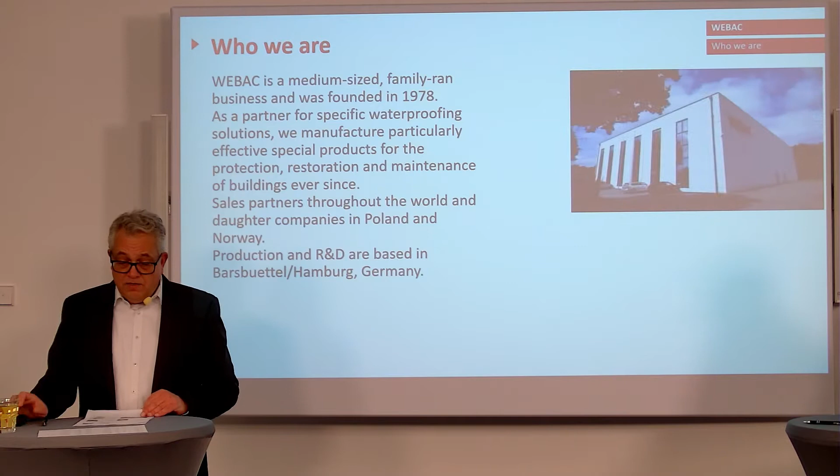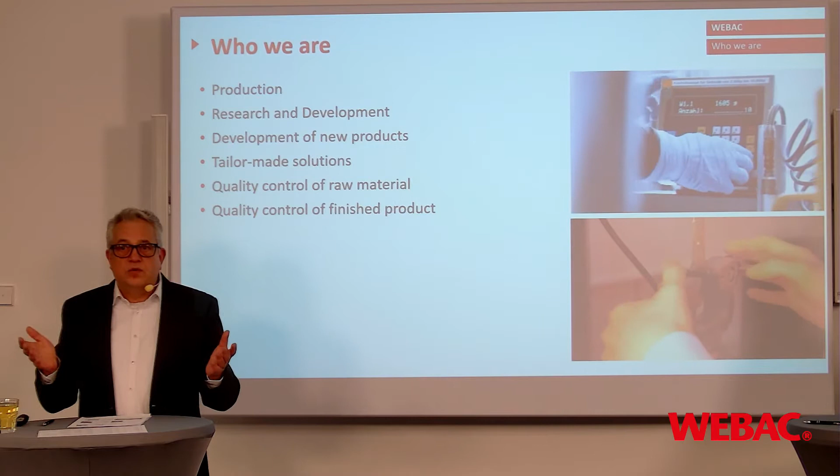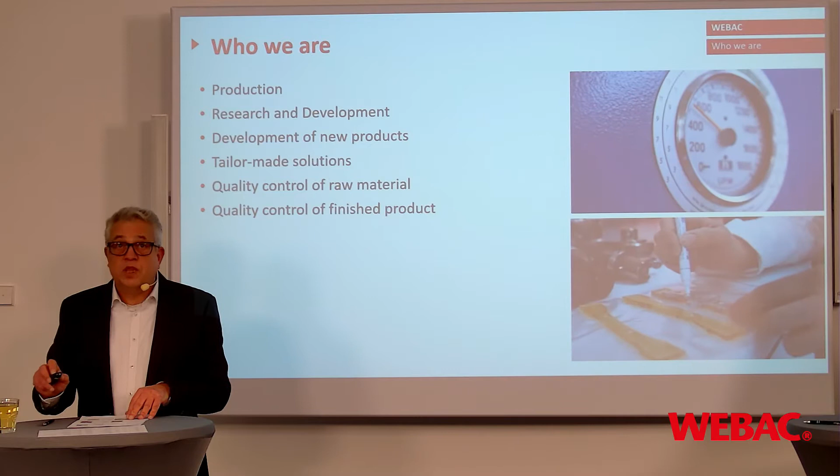WEBAC was founded in 1978. We are still a medium-sized family-run company. We are located here in Barsbüttel with our production, with our research and development center. This is very important, as you know, you find different climate zones, so the short way into the laboratory is essential for us. We are here in our seminar room, which becomes suddenly a TV studio.

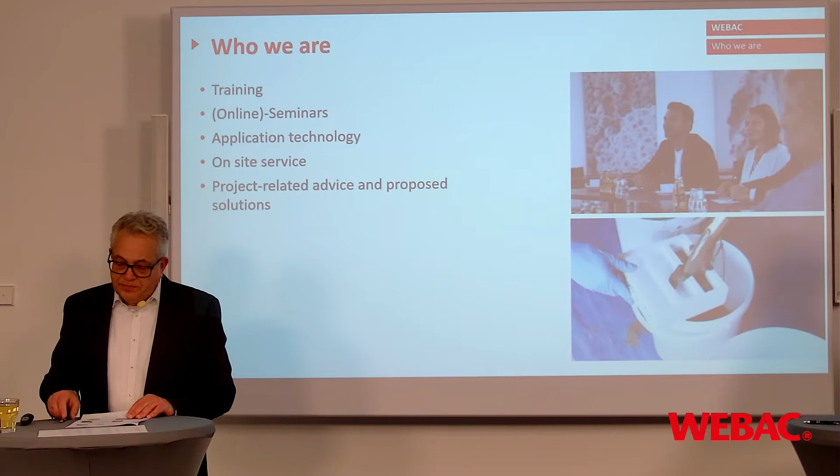Normally we give trainings here for designers, where the focus is on durability of the building. We give trainings for applicators, which is a little bit more hands-on training, how to drill, how to inject, what is the right injection pressure. But also for site managers, how can I control the injection works? What is in focus? What kind of material has to be used?

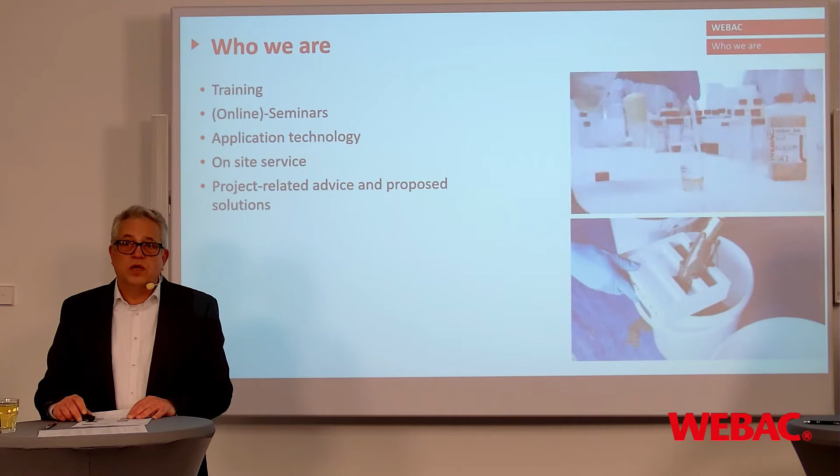Yes, we also provide the service, a site service. So if you have questions or if you have a building site where you are a little bit unsure what kind of material, how to apply, give us a call and we are at your site.

Today, our live seminar is about the sealing and stabilization of concrete. Should it be force transmitting? Should it be simply waterproofing? There, Maurice will tell you, will go more into the details.

Yes, I do. So our seminar is scheduled once again for 30 to 35 minutes and it will contain the following topics: the principles of crack injection, the analysis, what kind of state of dampness is on your building, the objective of use, what kind of filling materials there are, what is the difference between them, and how the injection procedure looks like.

As you can see here, we are talking about cracks simply in concrete. The reasons for the cracks, why they occur, how they are treated, are going to follow now.

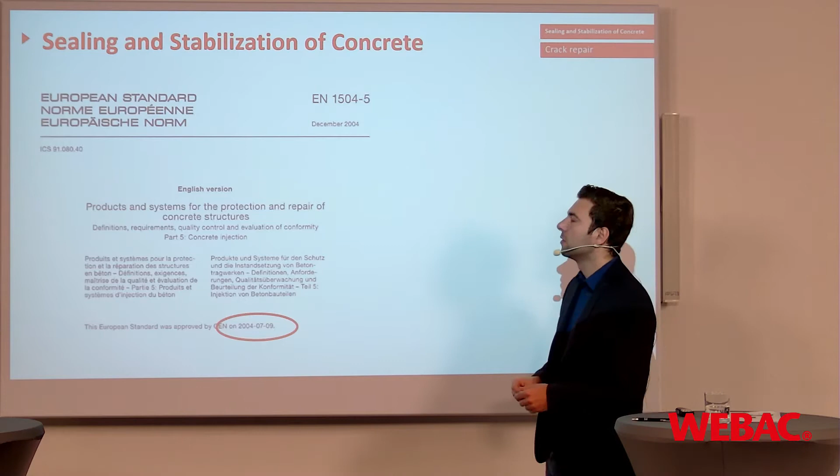First of all, we would like to talk about the standard. There is a European norm which regulates the crack injection in reinforced concrete. It is called EN 1504-5, and maybe you can see it here, highlighted.

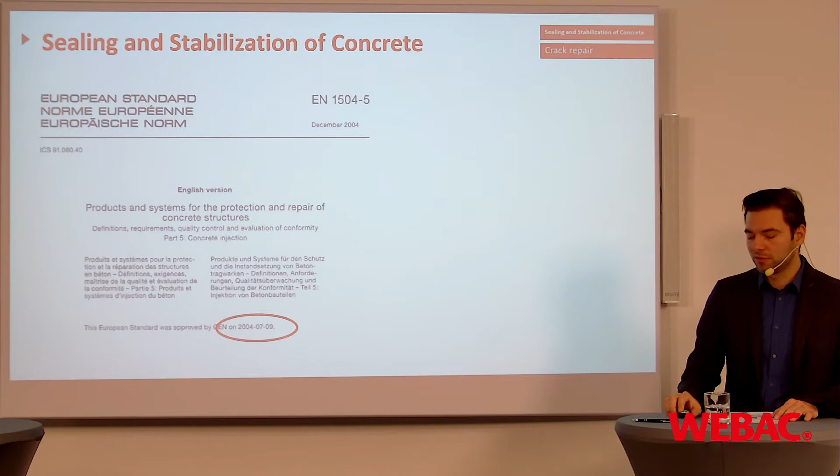The development of the injection materials has been ongoing, and therefore there might be some products that are even better or that does not fit into the norm that has been harmonized almost 20 years ago.

Like usually, I think most of you have followed our presentations yesterday. Once again, it's very important to carry out an analysis prior to your injection.

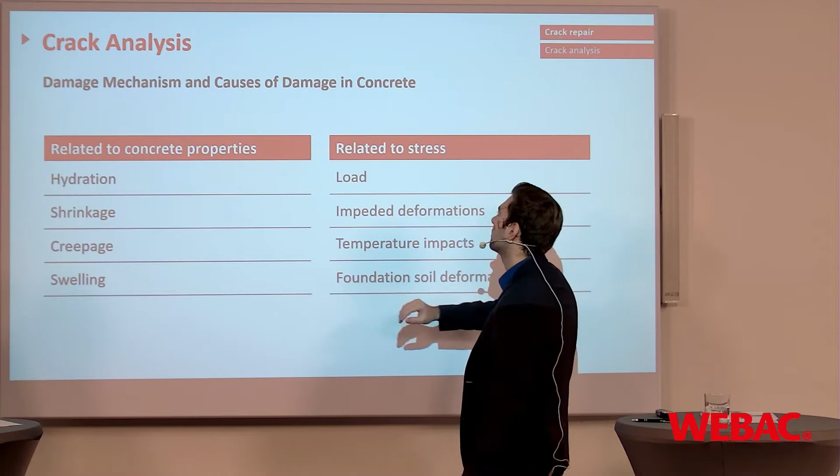So first of all, we would like to talk about the reasons why the cracks occur in concrete, and therefore there are two main reasons. One is related to the concrete properties, you can find them on the left-hand side, and the others are related to stress, on the right-hand side.

So first of all, you probably know how the concrete is behaving during the reaction. There is hydration in the concrete. The concrete can shrink, or there is creepage, or the concrete can even start to swell. So therefore, all these reasons that are related to the concrete properties, they can cause cracks in the concrete.

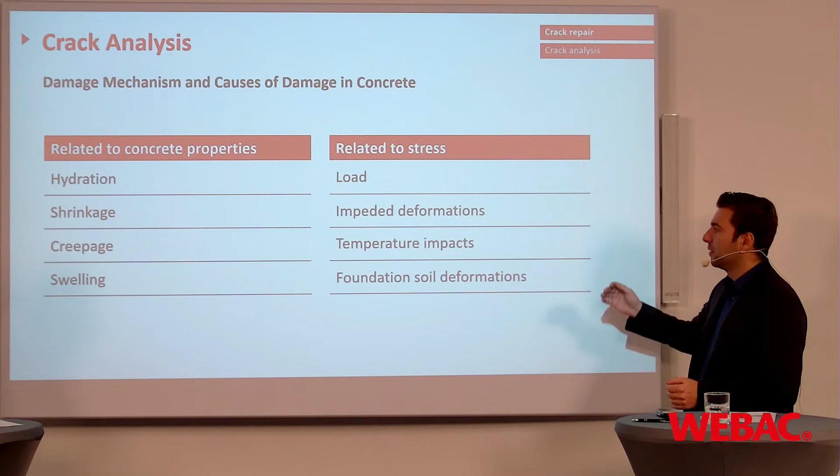The other causes are related to stress, which can be loads, deformations, temperature impacts, or deformations of your soil. What does that mean? If your building, for example, was designed for loads with forklifts of 5 tons, and after some time you see a change that the forklifts are now 10 or 15 tons, for sure this is going to have an influence on your structure, on your concrete. So unexpected loads on the concrete can cause cracks. Temperature impacts, the difference between summer and winter, big changes in temperature, or deformations in soil, like washed out soil underneath your structure causing settlements, can also cause cracks in your structure.

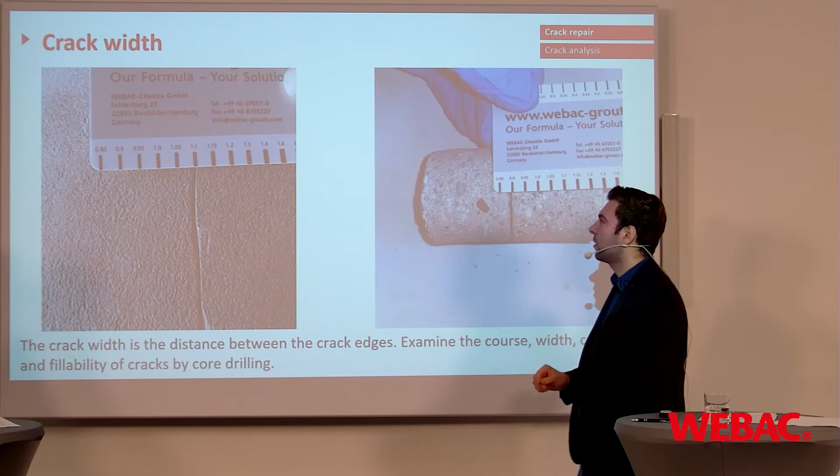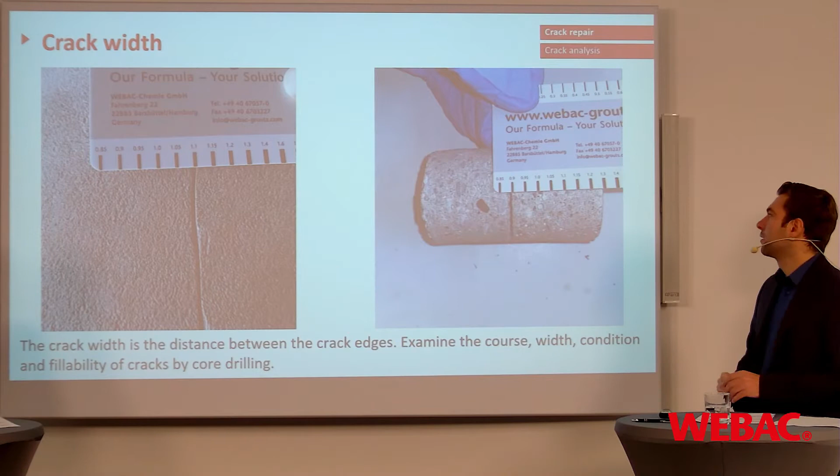It is very important to measure the crack width prior to the injection, and there are two ways of doing it. You can simply measure with a crack scale the width of your concrete on the surface. The other option, which isn't more complicated but requires further work, is to take out a core drilling. This core drilling gives you a better feeling and understanding of how the crack is going through your structure. Is there any change in the crack width? Is it smaller, thinner, or wider? Is it an even crack in the concrete? Are there pathways? These are things you cannot see from the surface, and therefore you would need to take out the core drilling.

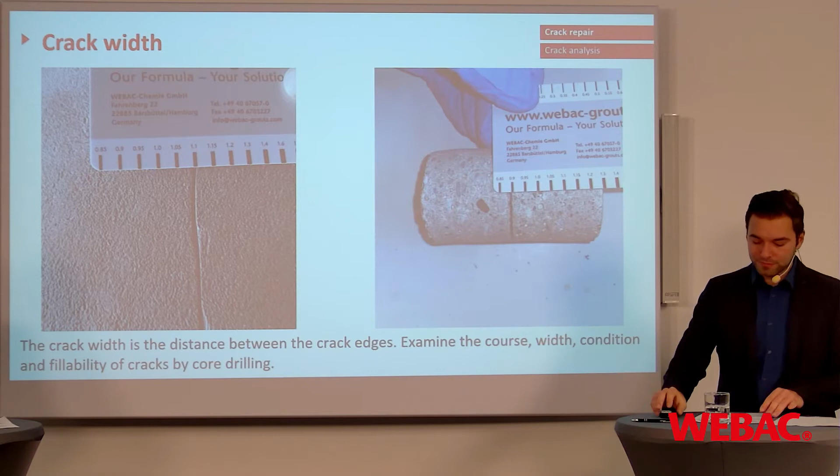Also, as you can imagine, there can be crack width changes, and depending on the changes, you need to see when the best time is to inject the crack. The most common or most known area where you can see this is the bridge deck. You have the expansion joints, and in summer times when it's warmer, the concrete is a little wider and the expansion joint is smaller than in winter times when the concrete is cold and shrinking once again. So the expansion joint is always a good indication of crack width changes, and you have to be aware of that and keep these changes in mind when you carry out the injection.

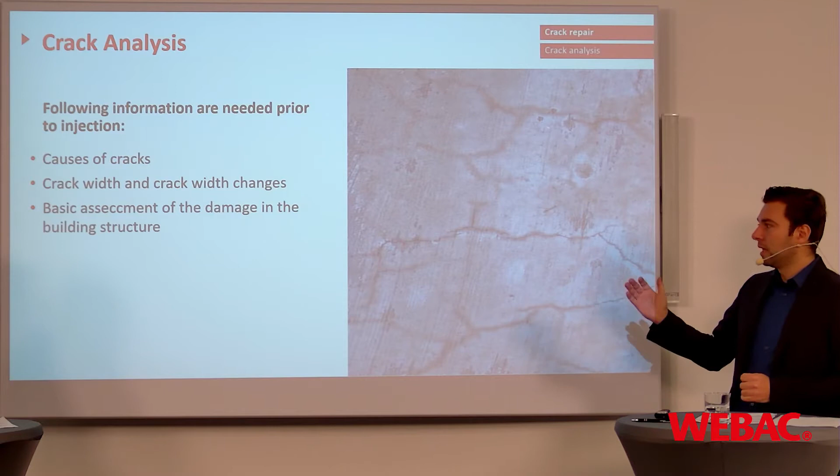So just to summarize what we've been talking about, before you carry out the injection, you would need to know the cause of the crack. Why do I have a crack or cracks in my building? Then for sure the width and the changes of the width, and also whether there are further damages in your building.

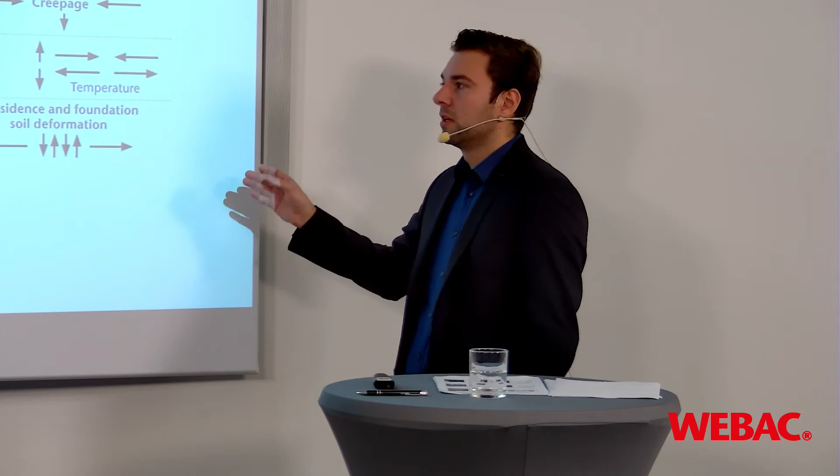There is going to be an overview of what kind of things go into the concrete repair work. So we are talking about construction joints in your basement. Depending on the concrete quality, there can also be gravel nests or just cracks. Once again, the connection between the bottom slab and wall, the construction joint there, especially when we are talking about basements.

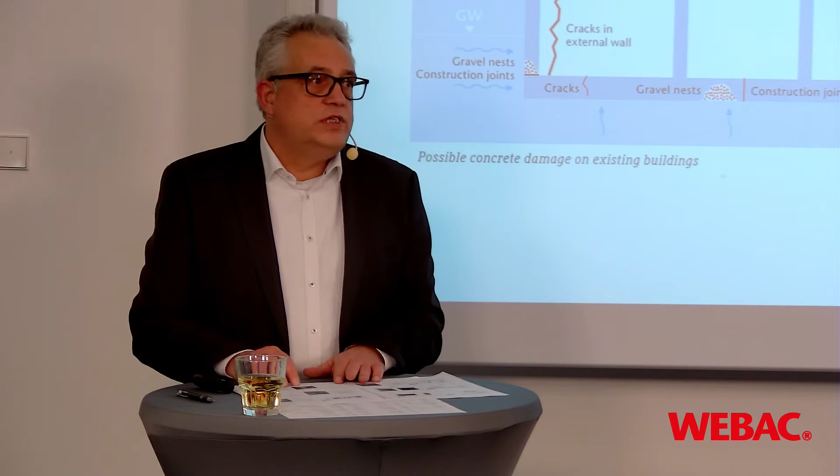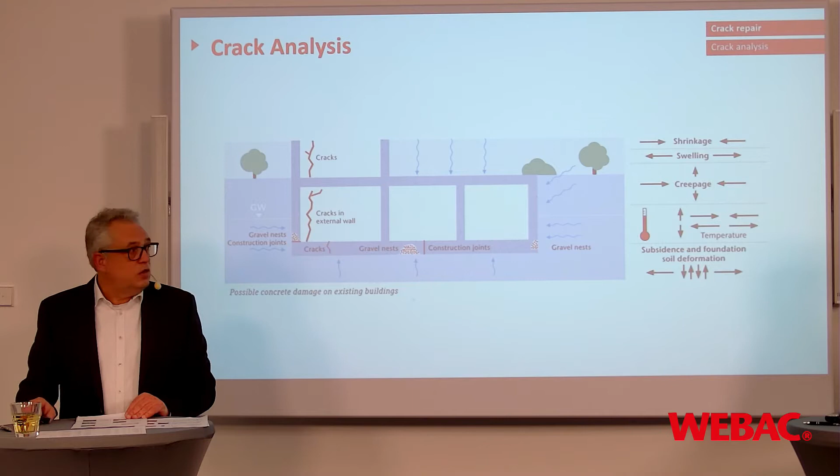And you probably are below groundwater level, where you can have the influence of water. Or if you're above groundwater level, then we are probably talking about dry cracks here. There, the point is also due to the shrinking of the concrete, you will receive mostly in the wall separation cracks. These separation cracks will go through your whole concrete, meaning the reinforcement is also exposed to water, and this can cause corrosion of the reinforcement. For the lifetime of the building, this is a big issue. So regarding shrinkage, it is in the interest of the contractor that when he pours the concrete, he doesn't use a lot of crack inducers.

So these are the most common cracks which have to be treated.

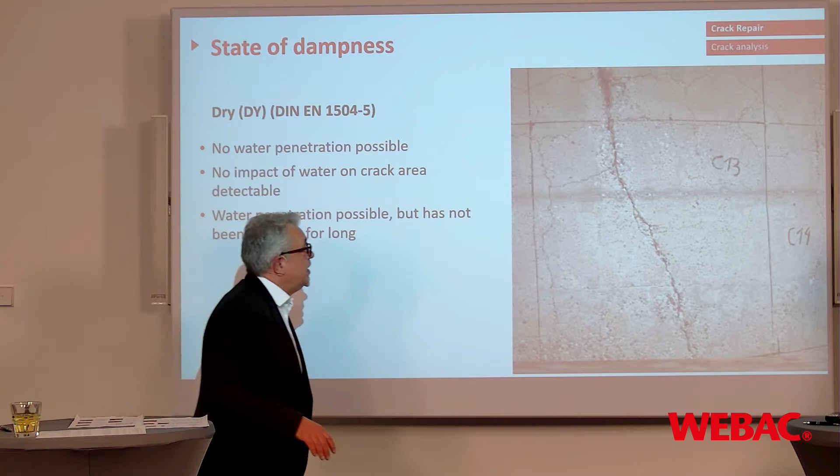Let's talk a little bit about the state of dampness. You mentioned it already. There are different states of dampness, above groundwater level and below groundwater level, and you have to treat them differently. So, state of dampness: everybody knows what a dry crack is. Here in the crack you see no water penetration.

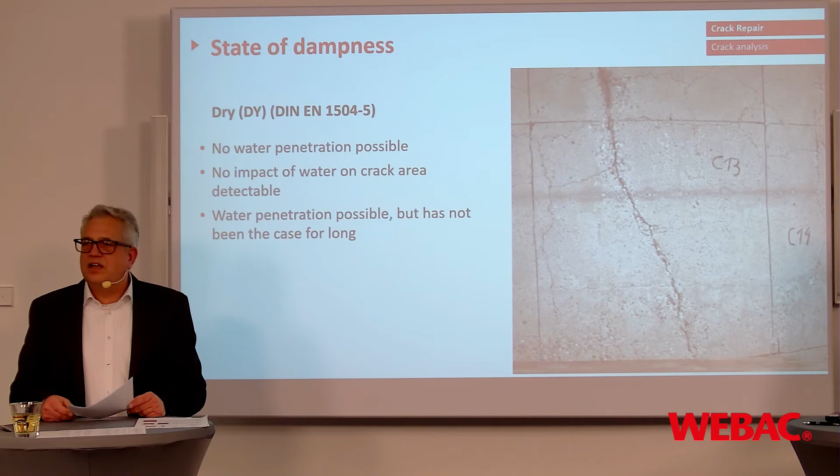The definition in the norm is a little bit funny for me: water penetration is possible, but has not been the case for a long time. How can you measure this? Whenever I hear this sentence, I think of an engineer sitting on a chair in front of the crack and observing it. But in my world, a dry crack is a dry crack.

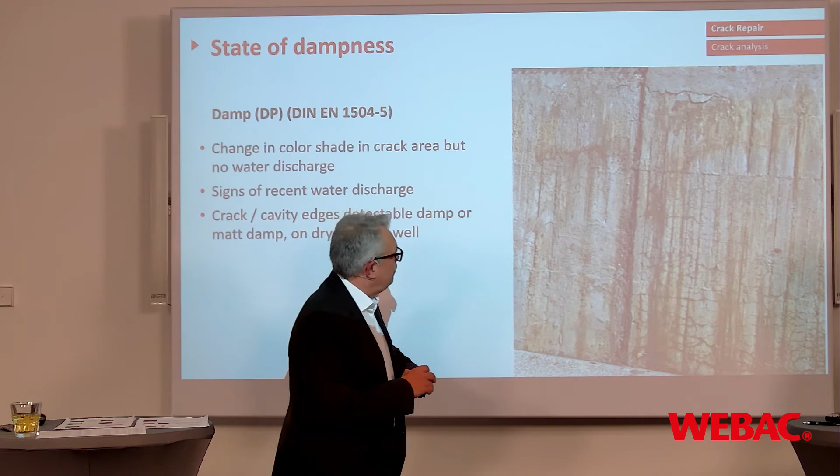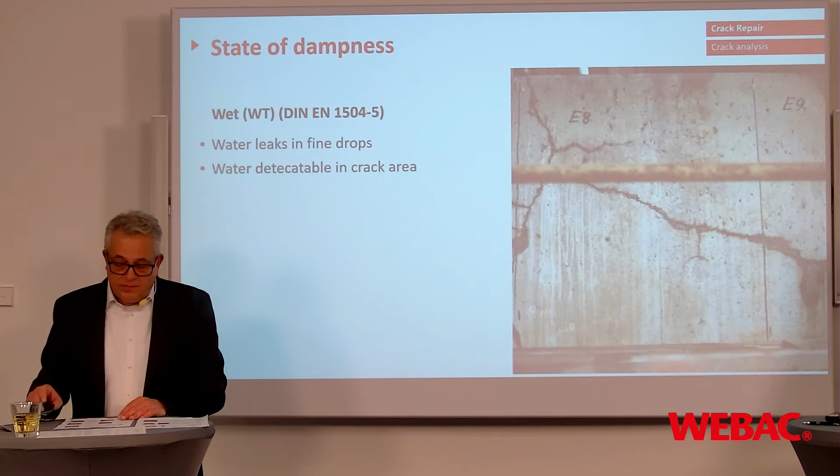Then you find damp cracks. All of us have seen it, where you see some shadows. In this case, cracks close to the surface. Here's a smaller one, but here you also see penetration of water along the reinforcement. Then wet cracks, you see here. There you find water in a liquid state, and here you also see some finer drops coming out of the crack. So this is the definition of a wet crack.

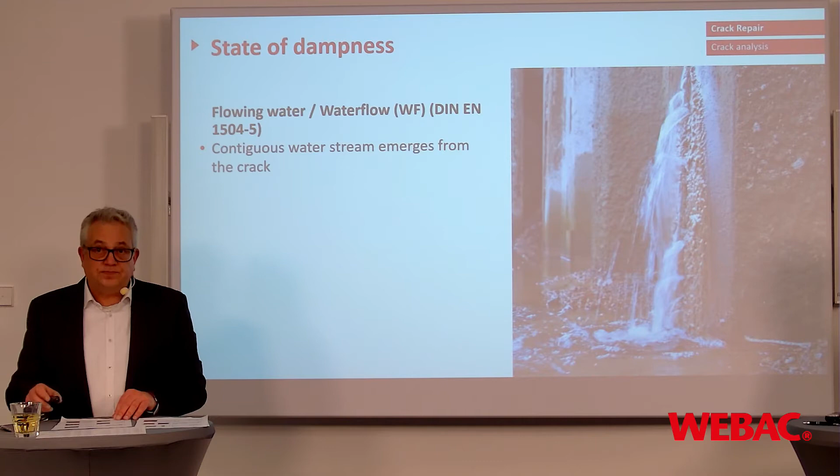And last but not least, I hope you don't have this case in your basement: pressurized water. So water is coming out of the crack, or in this case, out of a sheet pile wall, in a liquid and pressurized state. Four states of dampness: dry, damp, wet, and pressurized water. These cases have to be analyzed, and according to this, we also choose the filling material.

The definition in EN 1504-5 makes the difference between performance and workability. The performance is simply: what would you like to achieve? Would you like to glue the concrete together again? This is force-transmitting filling, category F, for structural bonding. Then the ductile filling of the crack. You will come later to the point of the material. This material is a little bit more flexible and can take some movements.

And last but not least, category S. There we are talking about acrylic gels, mostly for swelling fitted filling, meaning the material swells a little bit, and due to the swelling pressure, the crack gets sealed.

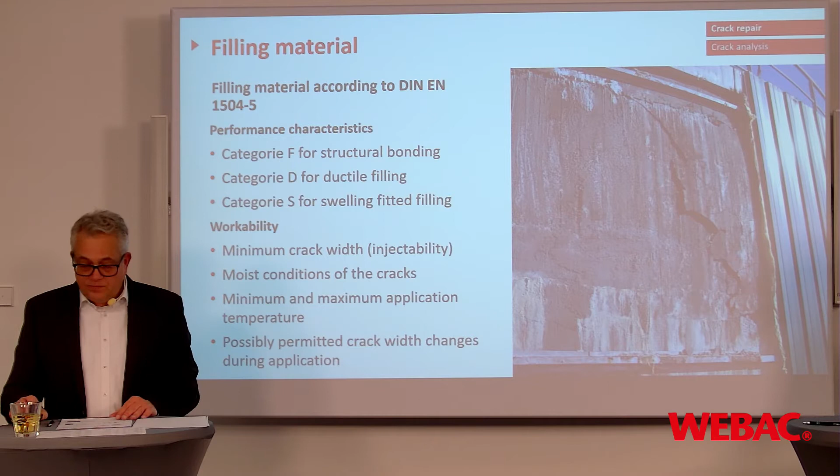On the workability side, as you already mentioned, it is important to know the crack width. You cannot inject a crack of 0.001 millimeter. That's simply not possible, but it will be dry anyway, so there's no need to. You have to take into consideration the minimum and maximum temperature, and also the crack width change during the injection. Okay, Maurice, now it's your turn with a comparison of impregnation and injection.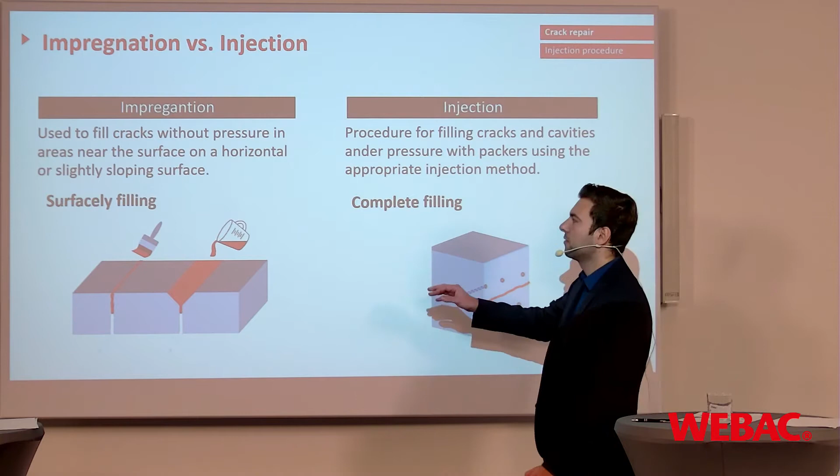So usually there are two ways to seal cracks in concrete. First of all, we are talking about impregnation. As you can see, impregnation goes into the structure by gravity. So you just pour the injection material into the crack, or you brush it in. As you can see, the filling grade is not that good, and therefore it's only a surface filling.

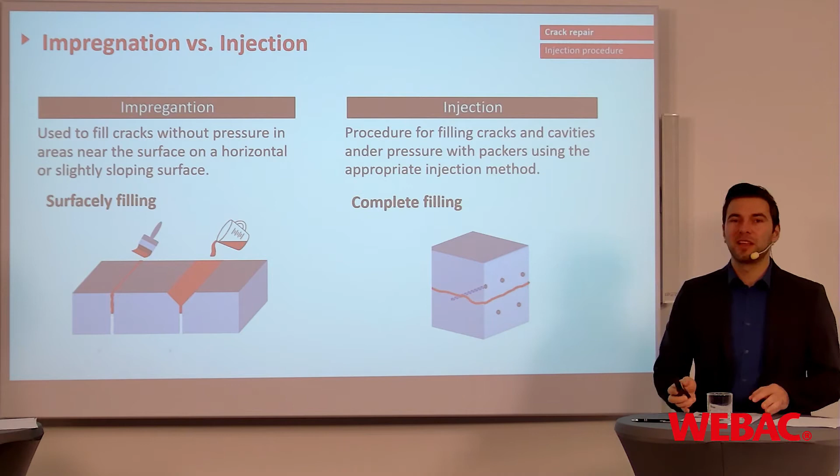In comparison, there is injection, meaning we are drilling and placing packers and using high-pressure injection pumps, and therefore the filling grade inside the crack of your concrete is higher. This is usually the target of injection, to achieve a high up to complete filling of the crack. But in some cases impregnation might be enough, and now an application video follows which shows you the steps of impregnation.

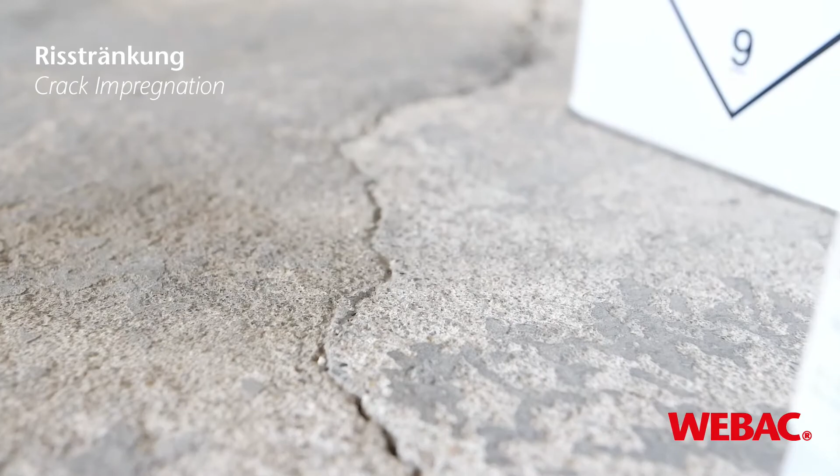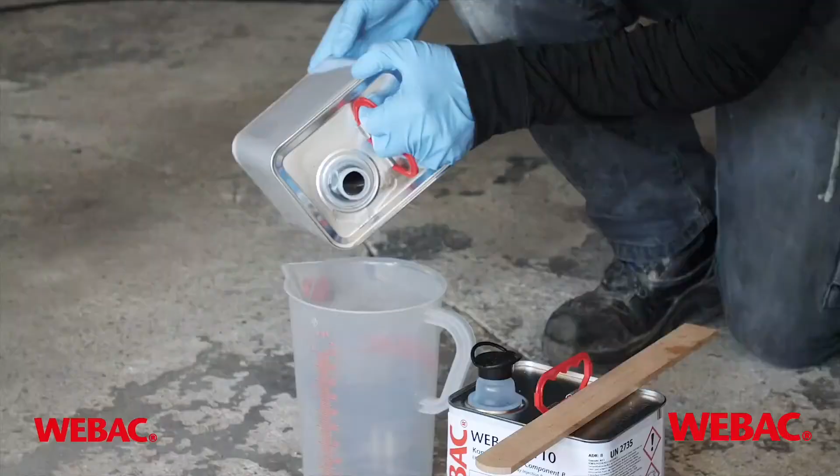First of all, you have to make sure that the crack is wide enough. So you use a grinder to widen the crack, and afterwards you suck the drill dust out of the crack so that the injection resin is able to penetrate into it. Now we are going to show you the mixing. Most of our products are two-component based, so you have to mix both components prior to application. The mixing ratio can differ, so make sure you mix the product in the right ratio.

As you can see here, the guys are using an epoxy resin. It's very important to repot the injection material, because you need to achieve a very good mixture of the materials. This is happening now. Now they are refilling it into a smaller measuring cup that makes it easier to fill into the crack, and they are going to fill it up now.

As you can see, the material goes into the structure by gravity. The colleague is pouring in the material and it just sinks down. This step has to be done a couple of times, because the injection material is going to penetrate into the concrete and find fissures, cavities and so on. So the material is gone and you have to repeat the filling until the crack is filled up to the surface.

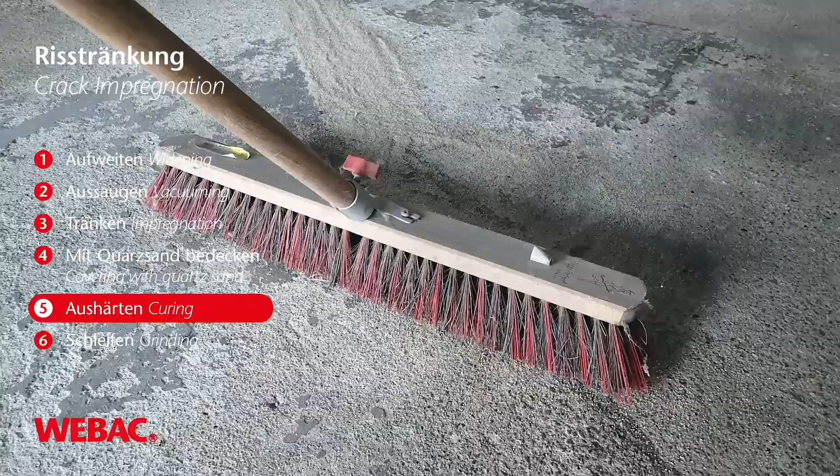Once you achieve the filling grade to the surface, you can just apply some quartz sand to smoothen the surface. And after curing, which is going to follow in a couple of times, so the material needs some time for reaction, and after it's cured, you just brush off the quartz sand, and afterwards you can grind the surface again to make it smooth, and afterwards you can start to apply, for example, a coating system.

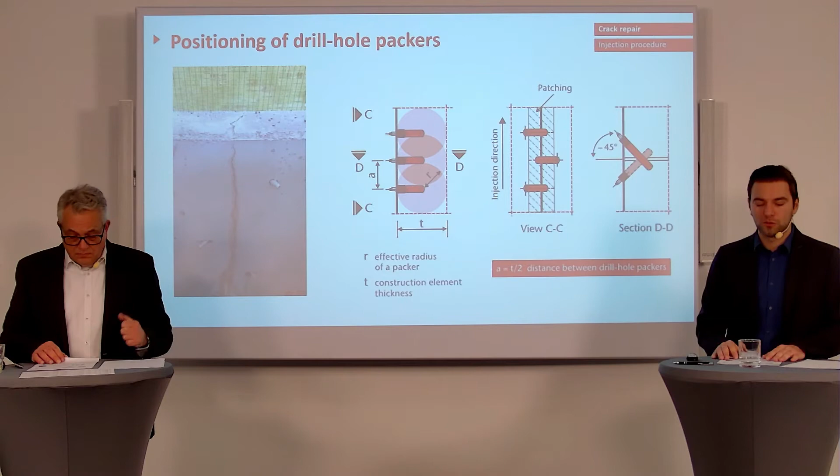So that was the crack impregnation, and I would now like to hand over to Markus, who's going to talk about the injection and how to do it. Perfect. Thank you, Maurice.

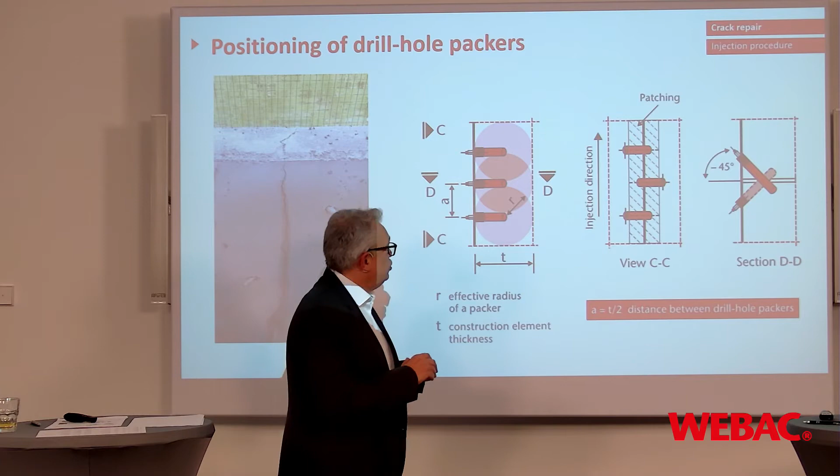In comparison to the impregnation, we find the pressurized injection with drill hole packers. So you find in the standards and norms, or we often get the question, what should be the distance between the packers? So the distance between the packers should be roughly half of the construction thickness. We should always inject from the lower part to the upper part. That's very important. And we should drill into the concrete with an angle of 45 degrees.

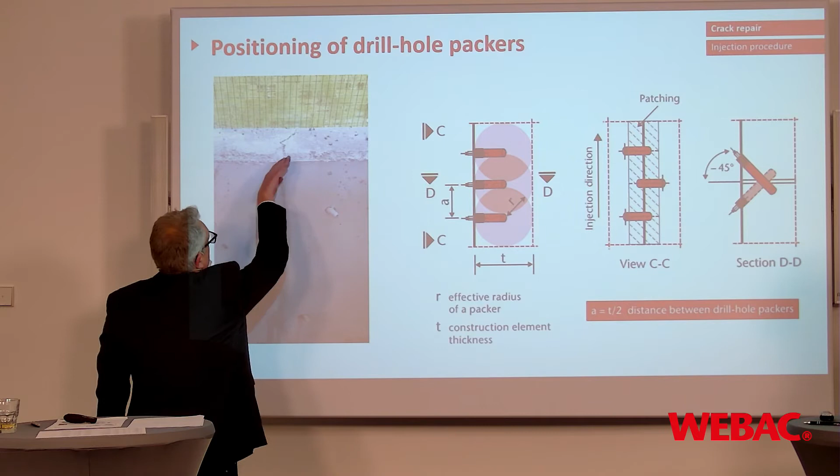I hope you can see this picture here. The reason is that if you are standing in front of the crack, you will never know how this crack went in the construction. In this case, it goes to the right side. And with this angle of 45 degrees, you ensure that you intersect the crack. That is the reason for the angle of 45 degrees.

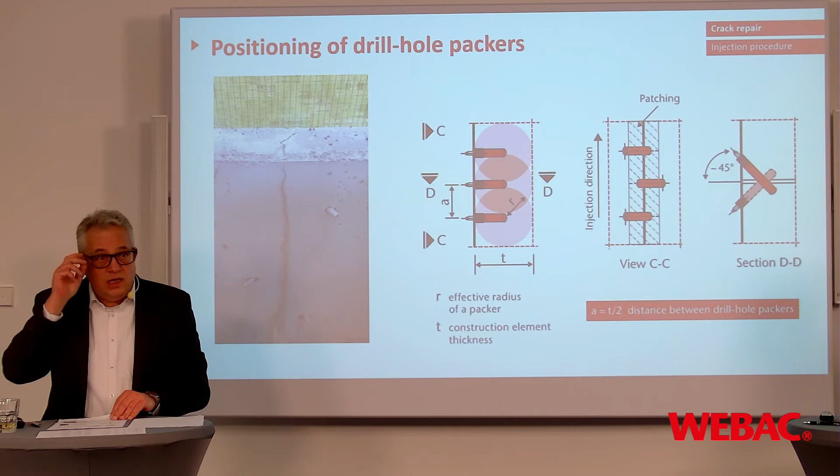So, distance, in general, you can say half of the construction thickness. If you now have a slab which is 1.80 meters, you will probably not drill 90 centimeters into the concrete, but this has to be seen case by case.

Injection pressure is always a question, and in Europe, or worldwide, the opinion is different. For example, in the north of Europe, they are simply saying, okay, I inject with a lot of pressure because then the material gets a better flow and I widen the construction joints a little bit so material can flow in better. We say, and this comes simply out of our experience, lower injection pressure over a long injection time gives the best results.

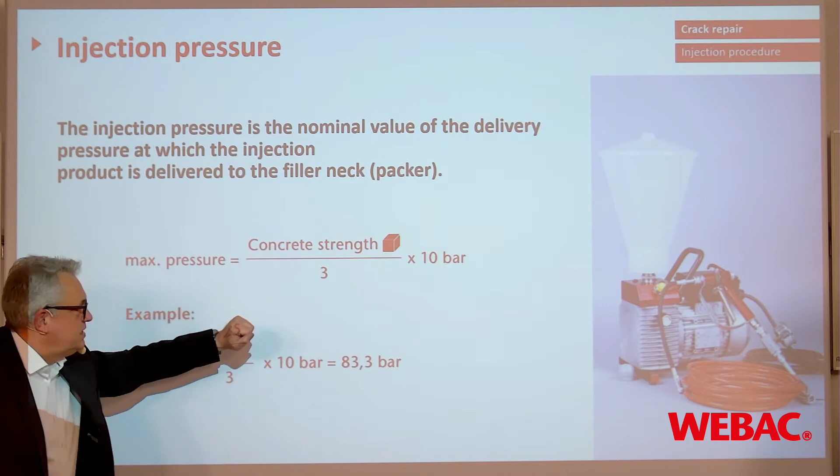A rule of thumb is to reduce the maximum pressure like following: the cube concrete strength divided by 3 times 10 bars. So for a C20/25, it should be not more than 80 bars, and 80 bars are 800-meter water column. In my world, that's a lot. Again, this is general speaking. It depends on the case and on the building site.

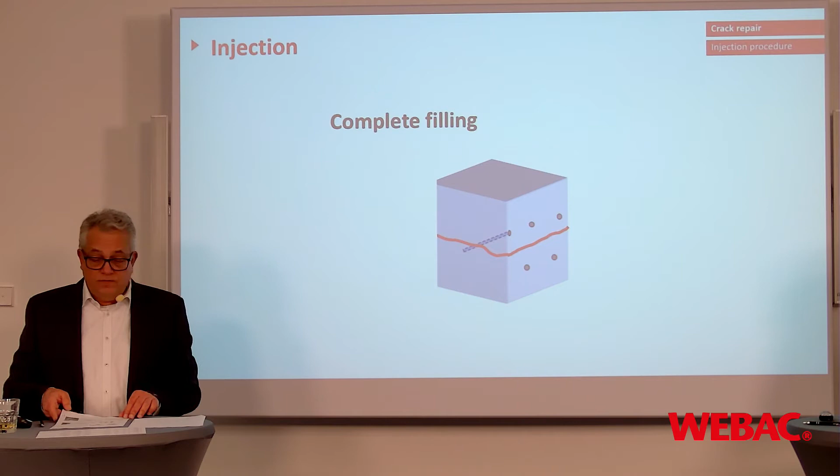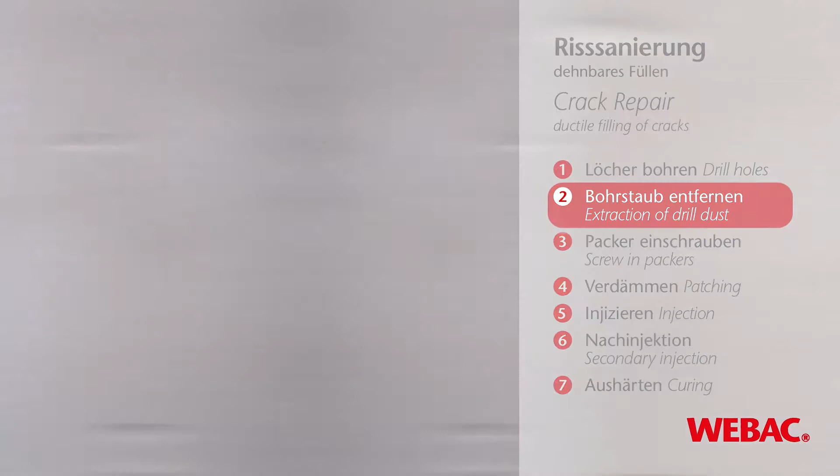So how this works now, we have prepared a small video, and let's take a look at this. So here we see a wet crack, I would say. Drops are coming out of the crack. First of all, you mark your drill holes in the distance we discussed. Then you are drilling, you can see it here very well, in this angle, to hit the middle of the construction.

Very important to remove the drill dust, because that's quite easy to understand. If you are pressing the drill dust with the injection material into the crack, then you block it, and the injection process will not be so easy. Afterwards, you are installing the packers and patch the crack, simply to prevent that material which you are injecting in the packer is coming out immediately to the inside of the building.

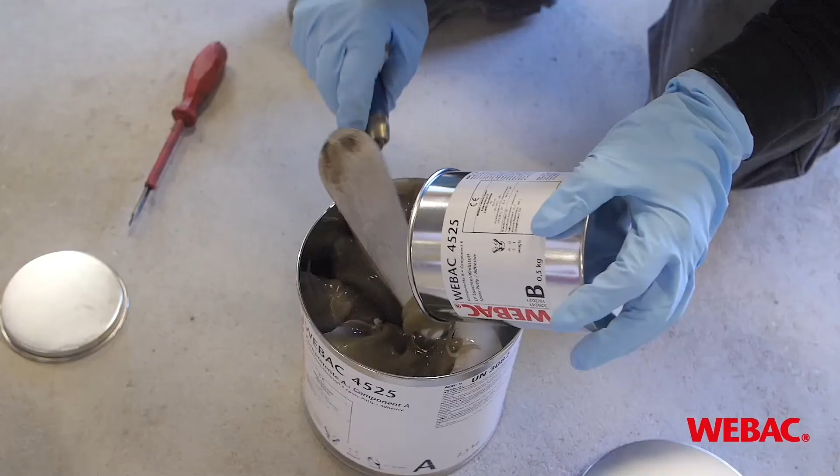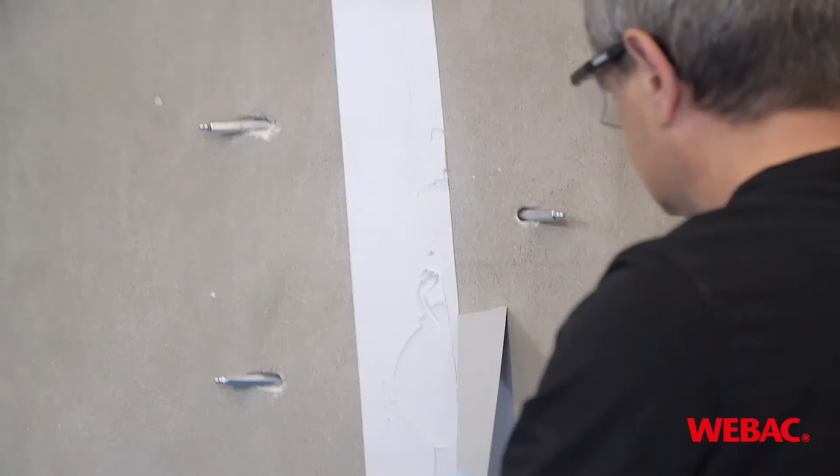You would like to push the material. We have seen it in the earlier graphics. You would like to push the material to the outside of the building. Very important, at the top of the crack, leave a venting opening. In this case, we are using polyurethane injection resin for the ductile filling of the crack, so it can take some movements.

Material is mixed, filled into the pump, and then the injection process starts. Again, always from the lower part to the upper part, and you have seen it in the video. Sometimes water which is in the crack is coming out of the next packer, and you are injecting for a longer time, and if you have filled the complete crack, you see the material is coming out

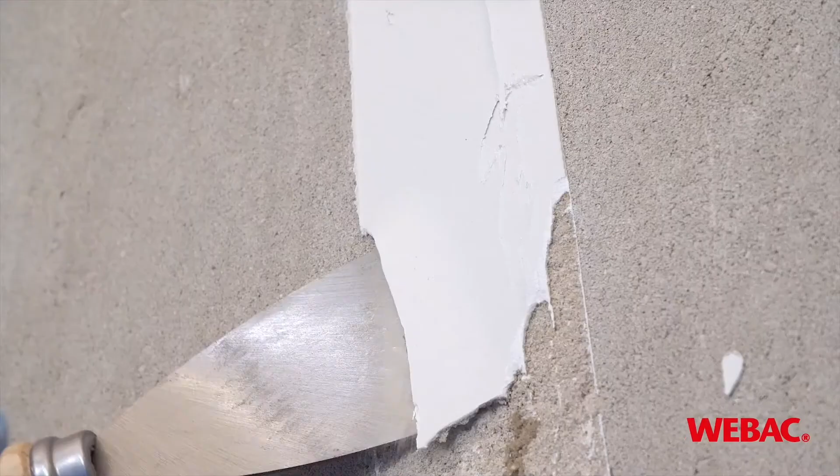at the top. Very important is a secondary injection, because due to gravity, the material gets sucked into the finest fissures, and if you are injecting from the bottom to the top, this re-injection is essential. Removing the patching, and make the surface nice and even again. Okay.

Summarize. During the injection, it is very important to observe the pressure range. Always inject from bottom to top. Don't forget the venting opening, and a secondary injection within the pot life is essential for good work. And then dismount the packers, close the drill holes, and you are done.

You are ready. So, Maurice, I would like to hand over to you. You can tell us something about the different kinds of material classes. Yes. So last but not least, before we come to your questions, we will now have a short overview of different kinds of injection materials and what they are used for. So we are now going to start with our PU injection foams.

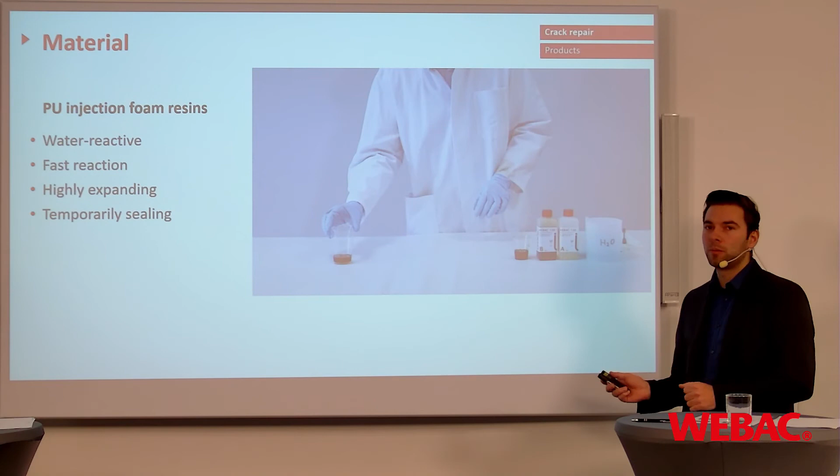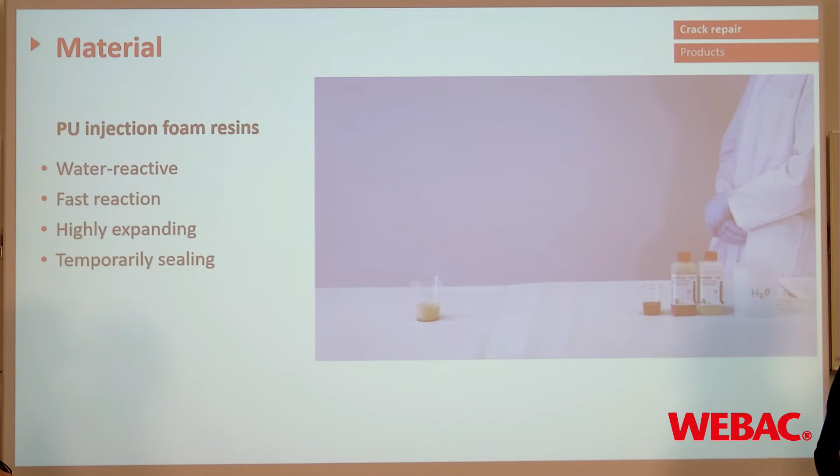As you can see, I just let the video run. In the meantime, you can see that our employee has started to mix a product. So the PU foams are water reactive. They will not work on a dry surface. They are only designed to stop very high water ingress. Coming back to the state of dampness, this would be the option for pressurized water. So they are water reactive, very fast reacting. They start after some seconds, highly expanding.

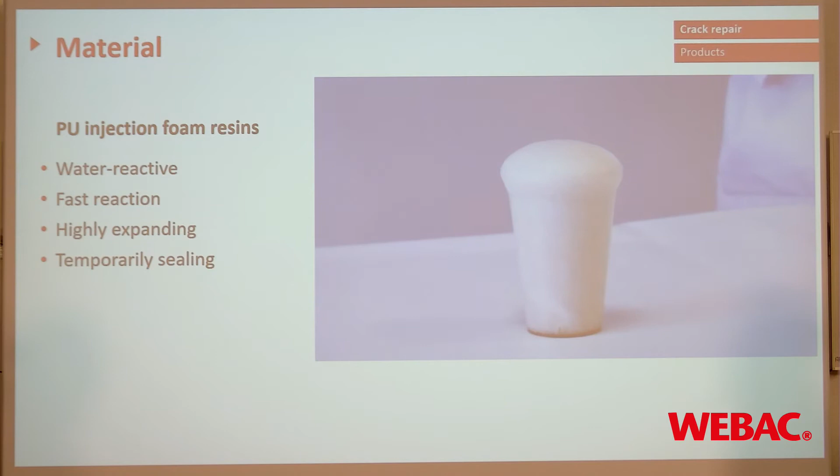Due to these properties, the high expansion, there is a lot of CO2 inside the foam structure, meaning you have small bubbles within the foam structure. In this foam structure, water penetration might be possible after a certain time. So therefore, it is only a temporary sealing, meaning you would have to carry out another injection with another material type to make it a long-lasting sealing.

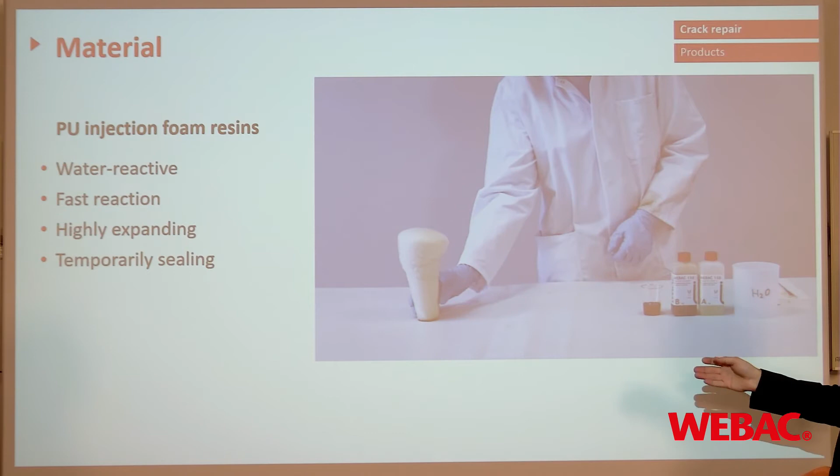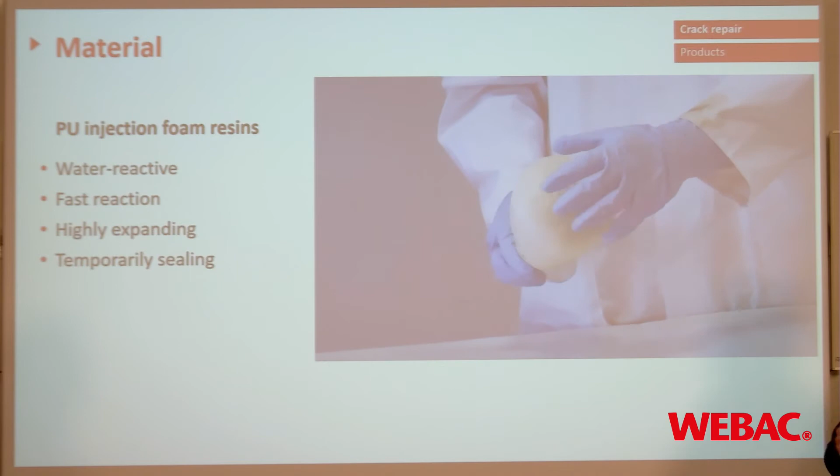Maybe you have seen it in the meantime. It was a small amount of material, just some drops of water, and the expansion is up to 40 times. So it's very fast reacting, highly expanding. And as you can see, you have an even foam structure here.

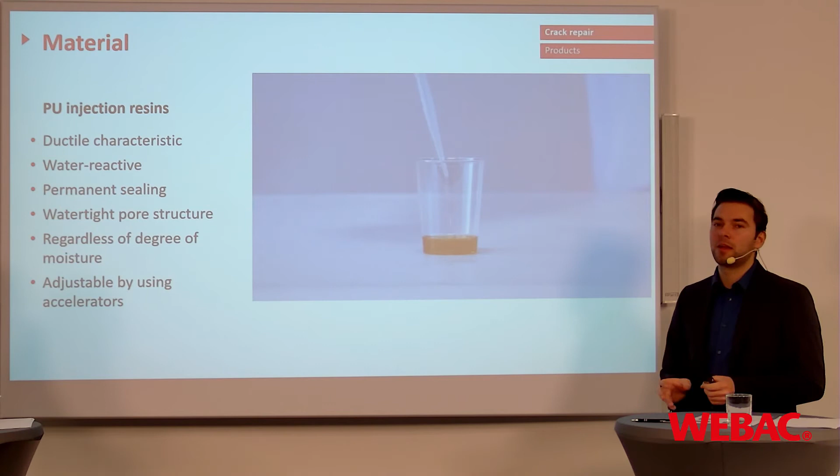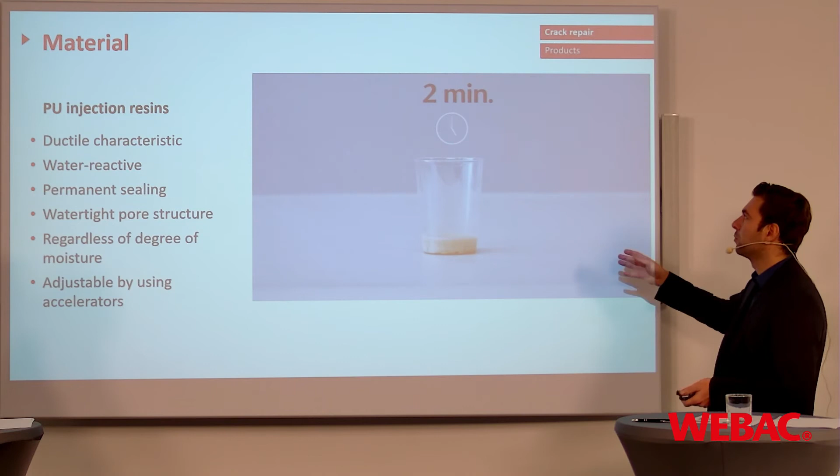Now, coming to the next injection material, we are talking about the PU injection resins. They are designed for the ductile filling of cracks, and they can be used in dry, damp, and wet cracks. So they are very flexible. Also water reactive. So if they get in contact with water, like you can see in the video, this material also starts to foam. But as you can see, we just put it in a time lapse. It's not seconds. We are talking about minutes. Depending on the material, it can be between 10 to 30, 40 minutes.

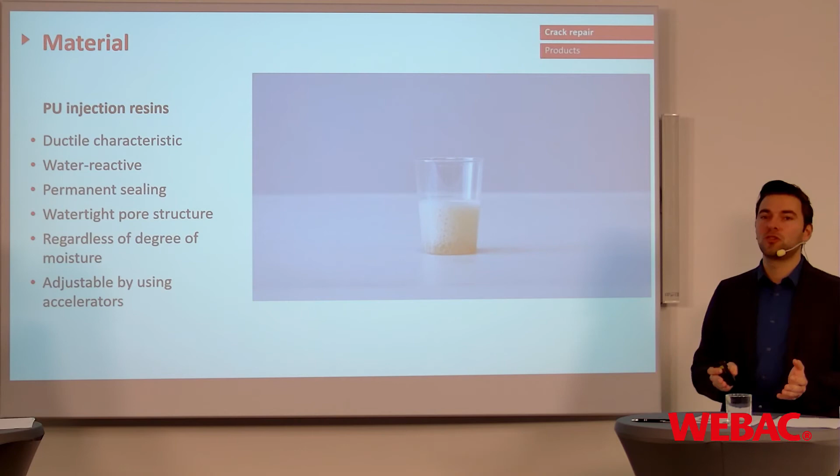This material and also the foam structure is designed for a permanent sealing because they have a watertight pore structure. So if you put the foam underneath the microscope, you can see that there are not too many bubbles, and you have a watertight structure. So if you're injecting a PU resin like this, the crack is filled and you have a long-lasting sealing, regardless of the degree of moisture, dry, damp or wet, and you can adjust the reaction time by using accelerators. Especially now in winter, there might be the need to speed up the reaction.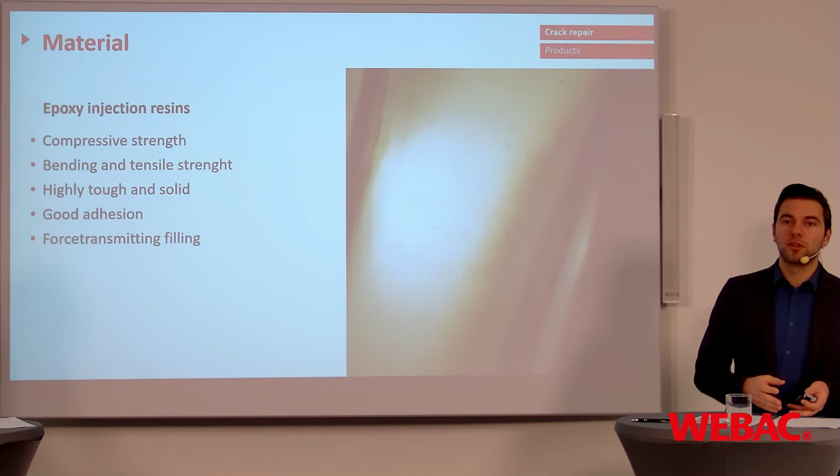The epoxy injection resins have a high compressive strength, a high bending and tensile strength. They are tough and solid, and they have very good adhesion to concrete edges. So due to the high mechanical properties, the epoxy injection resins are designed for force-transmitting filling, meaning you glue the broken concrete parts together and give back the strength. The compressive strength of these materials is higher than standard concrete. We are talking about a strength of 40 Newton per square millimeter or even higher.

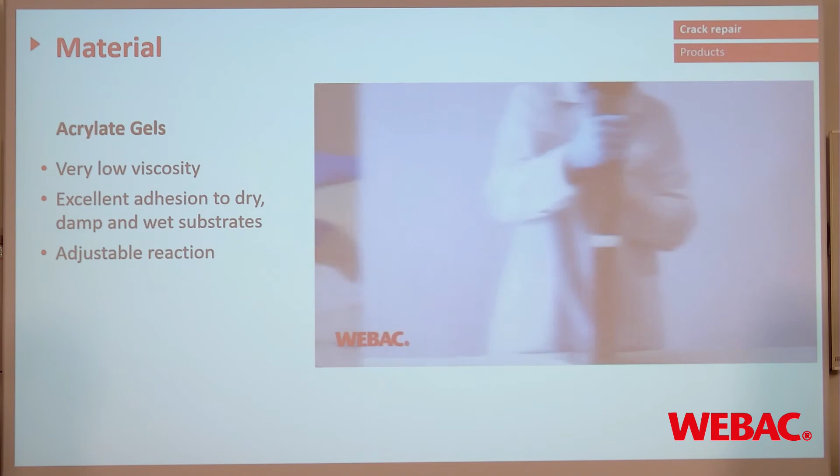And finally, the swellable fitted fillings are the acrylate gels. As you can see in the video, they have a very, very low viscosity, meaning it's more or less comparable to water. They also have a very good adhesion to dry, damp and wet substrates, and the reaction time can easily be adjusted by the amount of component B, the initiator of that product.

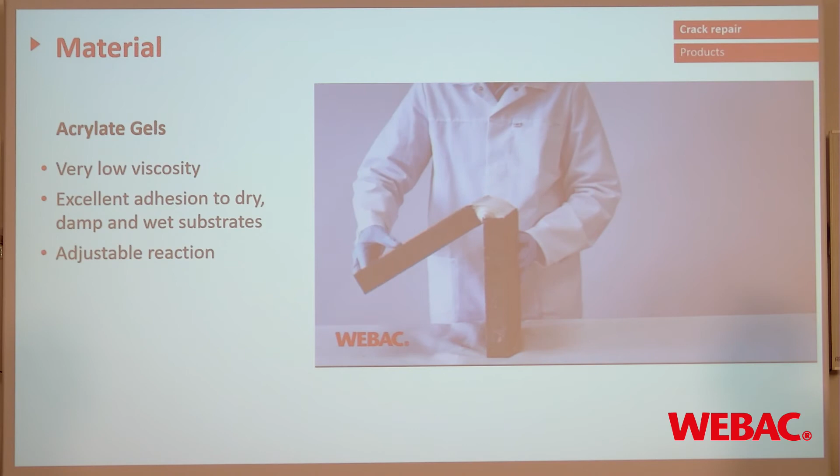As you can see in the video, they have a very high elasticity and a very good adhesion to the concrete. So if you would have a case like that, that your building is having movements like that, just get out of the building and run away. Then you don't have any problems with the waterproofing, there you have bigger problems.

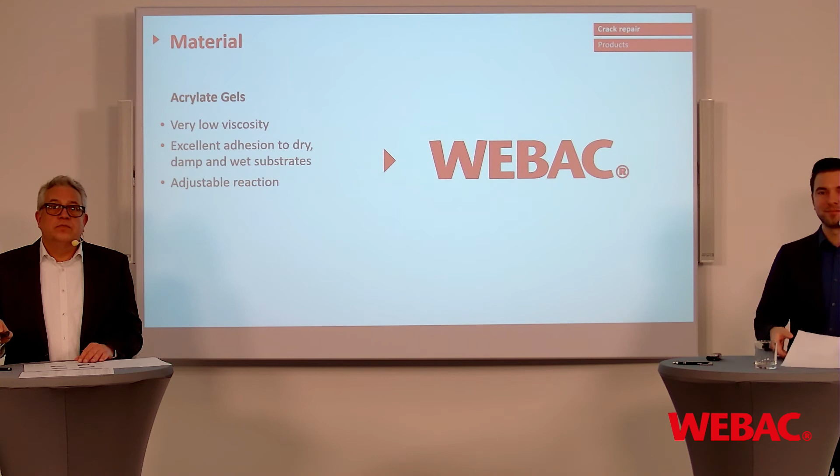Thank you for this great presentation. Markus, I have right now the question coming to your side about the secondary injection. So what is the purpose behind it, and maybe you can explain, should it be done the next day or a week later, or what is the background behind it? Okay. How can I explain it better?

The situation is, let's say this is a crack. Here is a crack. You are standing in front of the crack. You have drilled from both sides. You injected to the top. So then you go with a secondary injection. Material is now, due to gravity, going into the structure, into the concrete.

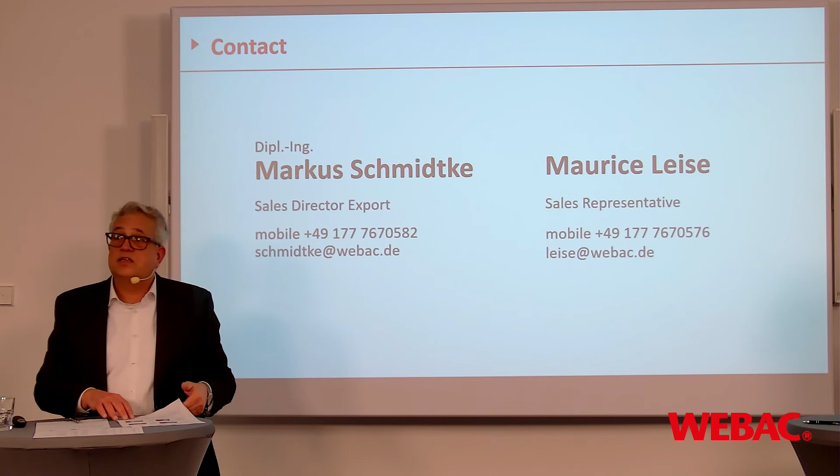So if you carry out a secondary injection, start at the lowest point within the pot life, and you see immediately material is coming out at the top or at the venting opening, then you have done a good job. Most injections are failing because the guys didn't carry out a secondary injection.

Thanks, Markus, for that explanation. So I have another question for Maurice. There's a question about the patching. We saw it in the video, but is it necessary? What is the purpose behind that? Does it depend on the material type, or what do you say about this?

Yes. So a patching is not always required. For example, as we have seen in the video, we were talking about a wet crack, and in most cases, wet cracks are just injected without a patching. A patching is of course necessary when you work overhead. So just to prevent that the material is coming out immediately out of the crack, you patch the crack prior to injection.

Another case where we always recommend to use the patching is for a force transmitting filling if we are working with epoxies, because there it's very important to achieve a high filling rate. According to the standard here in Europe, you need to achieve a filling rate of at least 95% to have a successful injection, and therefore, to prevent the material coming out too easily and so that the material stays inside your construction, for a force transmitting filling we always recommend to use the patching.